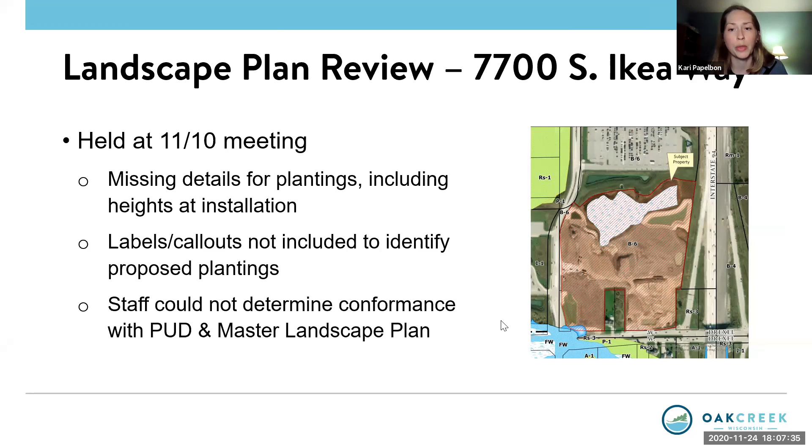This was held at the November 10th meeting, and the reasons for which were that it was missing some details, including for plantings, heights at installation. Staff also recommended that the landscape plans include labels or callouts to identify the proposed plantings on the plan a little bit more clearly. And because of these missing items, staff could not make a determination as to whether the proposed landscape plan was in conformance with the PUD and master landscape plan.

So we do have a revised plan that has been submitted. There have been some updates, including the symbol identification that staff recommended. The heights have been included for some of the plantings, although we do still have mostly container sizes. We do need to have the required installation height due to the requirements in the PUD and code for the installation and maintenance of the screening materials at a minimum height of 3 feet.

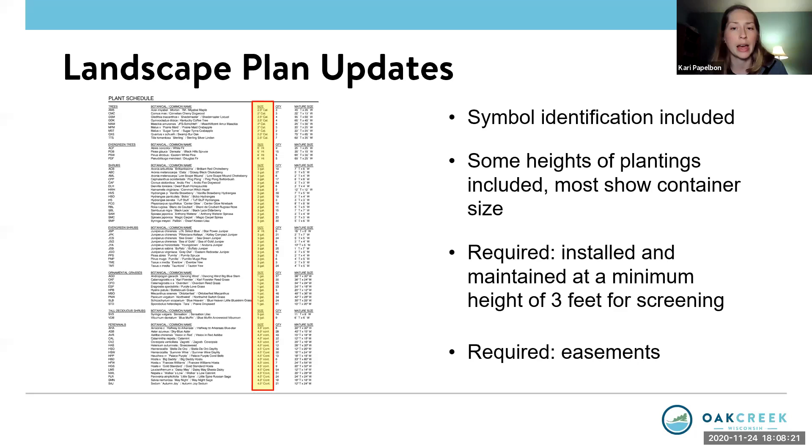So we do need to have those items updated. We also need to have easements shown on the landscape plans to ensure that we do not have any plantings that are interfering with the infrastructure.

So there are a couple of items in the landscape plan that were recommended in the staff report for update. What we're looking at here are particularly the 10 parking stalls adjacent to Creekside Crossing Circle. This garnered some discussion at the last review. In the master landscape guidelines, there is a provision to include ornamental grasses and/or perennials in addition to the required shrub plantings. Staff is recommending a couple of areas in between the planting areas for screening of the parking include those ornamental grasses or perennials to further screen those parking stalls. Otherwise we would have some gaps in that screening.

That same master landscape guideline is also being recommended along the eastern parking areas adjacent to the single-family residential property, to include some plantings in between the proposed plantings. Now there is a caveat to this. There is quite a bit of grade proposed here in terms of slope. There may be a requirement for either grading to knock that slope down, as we discussed in the overall site plan review, or there may be a requirement for a retaining wall, in which case the landscape plan would have to be adjusted to accommodate those. However, we are still recommending, if the landscape plan being proposed can be accommodated, to incorporate the additional ornamental grasses or perennials in between those groupings to further screen those parking stalls from that adjacent property.

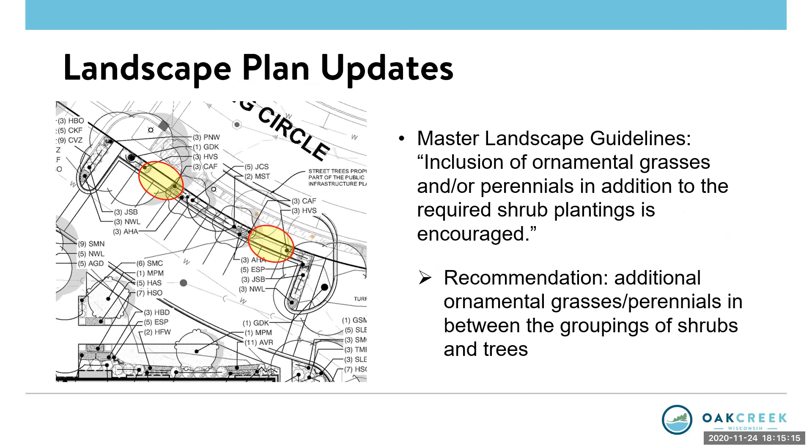Yeah, that should not be an issue. I think specifically on the northern section with the 10 on Creekside Circle, yes, this one, that should not be an issue. I think the only thing, and we'd be more than happy to work with staff on the eastern border, is just determining what the best solution is.

Again, as Kari mentioned, the grade - you can kind of see in the picture on the right that those lines that are bunched together indicate a pretty steep grade. So we'll just have to find the best solution to provide appropriate screening within those, but we're happy to work with staff on what that best solution is. Thank you.

Okay, is that it from everybody?

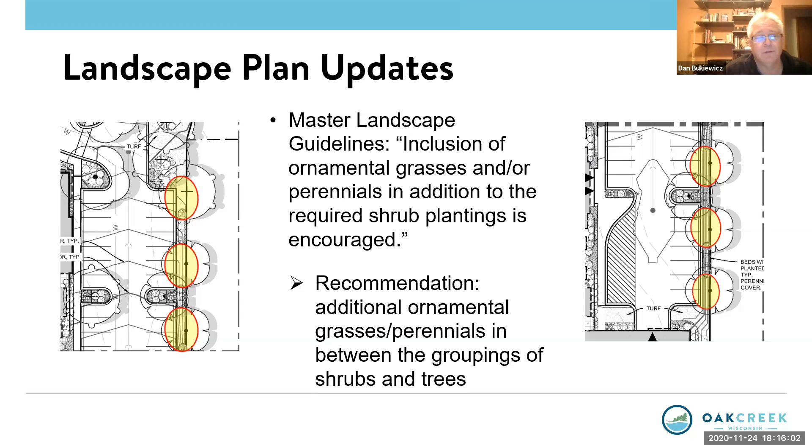I guess, I concur, I think it's a good plan. I think staff's done a good job. I like the addition, the idea of the ornamental grasses - they grow up, they make a great screen, they aid the wildlife. I think it's a good plan overall, so I have no problems with it at all.

Seeing no further discussion, we'll look for a motion on 5A. Lorick moves that the Plan Commission approves the landscape plans submitted by Kevin Kennedy, Walden OC LLC, for a portion of the property at 7700 South IKEA Way, Lot 4 of CSM to be recorded, with the following conditions: Number 1, that all relevant code requirements remain in effect. Number 2, that all conditions of approval from the November 10th, 2020 Plan Commission review are in effect. And number 3, that a revised landscape plan incorporating staff comments is submitted in digital format for review by the Department of Community Development prior to the submission of building permit applications.

Guzekowski will second. Roll call. Hannah, aye. Sullivan, aye. Grillo, aye. Lorick, aye. Kavich, aye. Guzikowski, aye. Lonnie, aye. Seifert, aye. Chandler, aye. Okay, thank you very much.

And again, Dan, just please continue to work with staff, and we trust all the right decisions will be made that way. Appreciate you coming tonight. Have a great Thanksgiving. Thanks, everyone. You too. Okay.

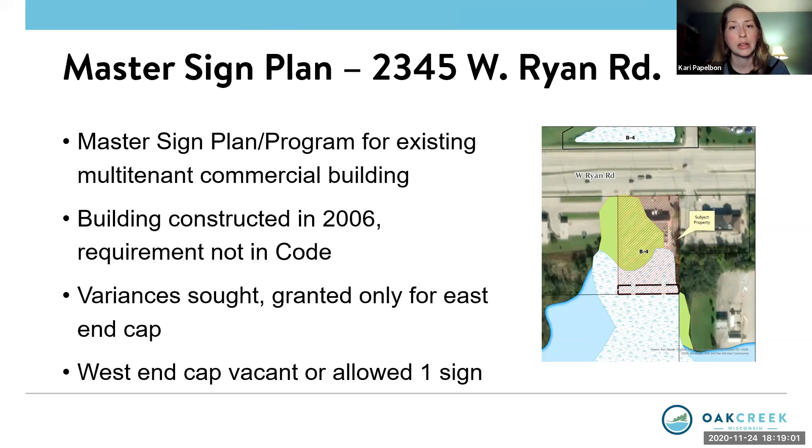Variances have only been granted to one of the tenants, and that's the east end cap tenant. The west end cap has only been allowed to have one sign, or it's been vacant. So right now we do have a tenant in that west end cap that is requesting additional signs, and they were provided two options. One was to pursue variances as had been requested in the past. However, there was a risk, since variances had been denied for the tenant spaces in the past.

The second option, and the one we are talking about this evening, and staff had been helping the applicant and the consultant to present to the Plan Commission, is the master sign plan, submitted by the landlord for the property.

The proposal in a nutshell allows for each of the tenant spaces to have one sign on the north elevation, calculated at 1 square foot of signage for every lineal foot of tenant frontage, up to a maximum length of 75 feet and a maximum sign height of 3 feet. One sign would also be allowed on the west elevation for that end cap and one sign on the east elevation for the other end cap.

They would be allowed a maximum square footage equal to their north elevation. This chart shows all of the allowed signs on the building, the maximum square footage, and the maximum length. The end cap tenants would be the only ones allowed to have two signs. Per the master sign program, which has a few other items regulated by the landlord, no signs would be allowed on the south except those required on the doors to identify the tenants.

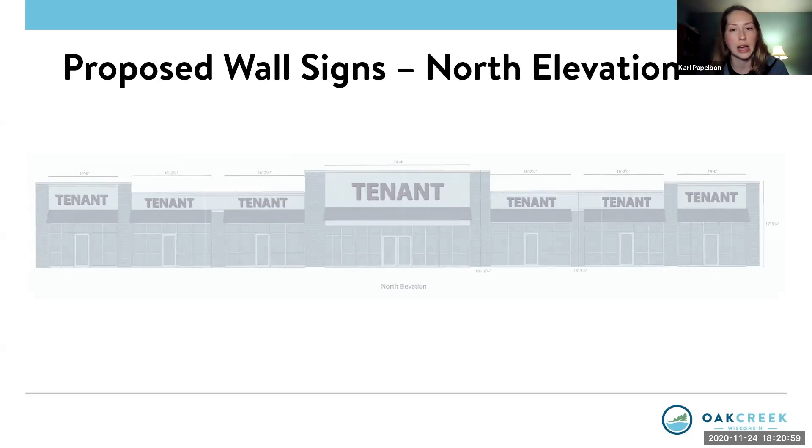This is a graphic showing what the north elevation would look like in the master concept. This is an existing building with existing signage, which will be important when we get to the one change staff is requesting. The end cap tenants will have the same square footage allowance as the north. The monument sign is existing, and they're not proposing any changes to that.

The one change before we get into the suggested motion is for section E of the master sign program. This was in the staff report, and we're requesting, as part of the suggested motion, that this be amended to clarify that any signs, regardless of whether they existed prior to the adoption of this master sign plan, would still have to abide by code.

There have been some temporary signs in place in this area, perhaps not for this particular building, but in the area. We just want to make sure everyone is aware that signs need to abide by code, and some may need permits. So with that, the suggested motion is for approval, as shown on the screen for Plan Commission consideration.

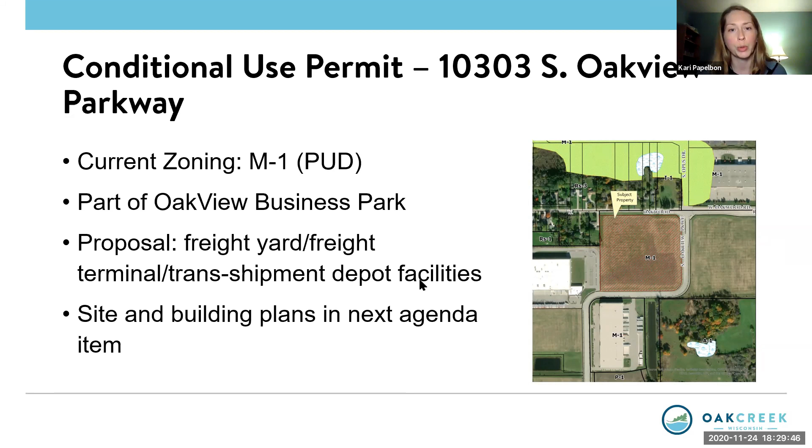Thank you, Mr. Mayor. This property is currently zoned M1 PUD. It is part of Oakview Business Park, at the northwest corner of the park. The entrance is off of Oakwood Road, and the proposal is for freight yard, freight terminal, transshipment depot facilities, or what we would normally refer to as distribution facilities. The site and building plans for this particular parcel are actually on the next agenda item for Plan Commission consideration, so we will be spending the remainder of this meeting discussing this property.

Potential uses within the proposed building include warehouse, light assembly, and distribution. Although no tenants have been identified, the building can accommodate a single tenant up to 4. There are about 28 depressed docks and 4 at-grade docks on the west side of the proposed building. They are anticipating 80 employees, although that may change based on the type of users that end up being tenants. They show parking for 28 trailers with 28 future parking stalls on the west side of the dock area, and 110 parking stalls on the east for employees and visitors, each accessed by different access points off of South Oakview Parkway.

Anticipated hours for the tenants within the building right now are estimated at 6 to 7, however that will likely change based on the tenant's operational needs. One quick announcement about the outdoor storage mentioned in the staff report: it would be limited to the parking of trailers and trucks in the loading dock area, possibly at the docks themselves, although as seen in the site plan, there are 28 parking stalls. There would be no provision for additional outdoor storage, and tenants, based on their particular business operations, may require additional conditional uses depending on the extent of their business.

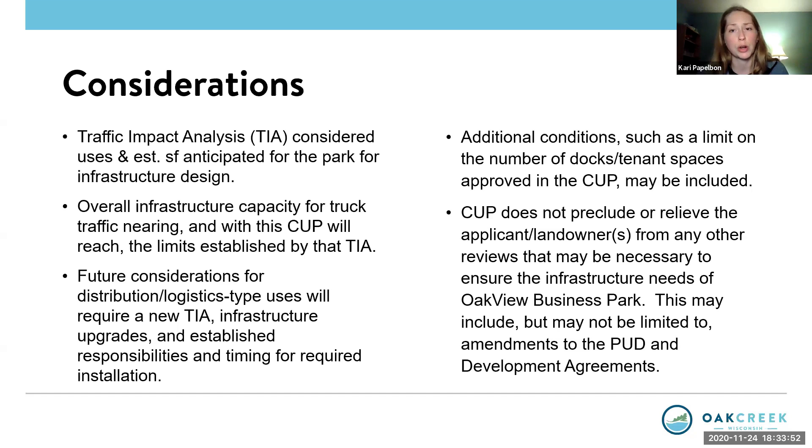Mr. Mayor, thank you Kari. Kevin is the applicant—would they like to say anything, or are they just available for questions? They are available for questions, and then we did have a neighbor sign up to speak as well.

Sure, please allow the neighbor in. All right, Maggie, you should be able to unmute yourself, and then we'll need your name and address for the record. Sure, I'm Maggie Menard Miller, 320 West Oakwood Road.

We live directly across from where the trucks would be coming and going, and we also, on a northern part of our property, are bordered by the FedEx truck terminal. So what you're proposing here tonight is having truck terminals both to the south and to the north of our residents in a residential area. I take this as being quite unfair.

If there's other space available in that park, I would think yet another truck terminal would be more appropriately placed someplace else than directly across to and next to properties that are clearly residential. We had a nice quiet neighborhood here for a long time, and we've been promised earth berms and whatnot, and we'll talk about that in the next point. But I think overall that this is a really bad choice to have directly across from our residential area...

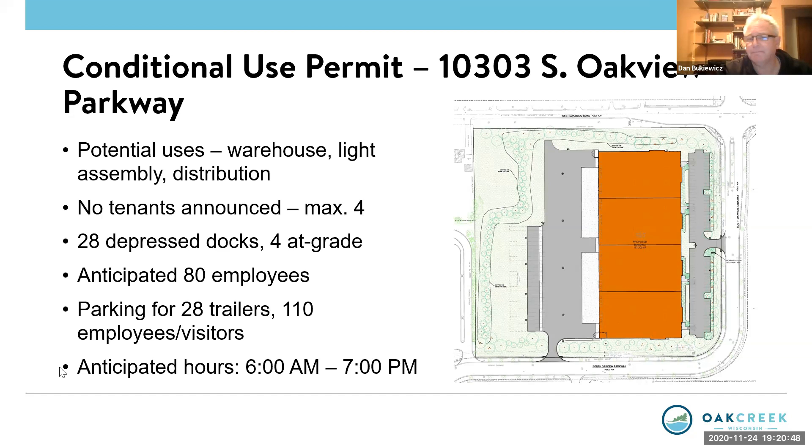How about a motion? Guzekowski makes a motion that the Plan Commission recommends that the Common Council approves a conditional use permit for a freight yard, freight terminal, transshipment depot facilities within the multi-tenant building on the property at 10303 South Oakview Parkway, after a public hearing and subject to conditions and restrictions that will be prepared for the Plan Commission's review at the next meeting, December 8th.

Seibert seconds. Roll call? Anna, aye. Sullivan, aye. Grillo, aye. Lorik, aye. Kavich, aye. Guzikowski, aye. Donnie, aye. Seibert, aye. Chandler, no. Okay.

That leads us to 6C, and as Kari said, this is a plan review of the building site, landscape, and related plans on the building we just talked about for the Dickman Company on the property at 10303 South Oakview Parkway. Thank you, Mr. Mayor. So now we are going to move into the actual site and building plan review for the property we were just discussing. Again, this is in Oakview Business Park, at the entrance to that park on the north.

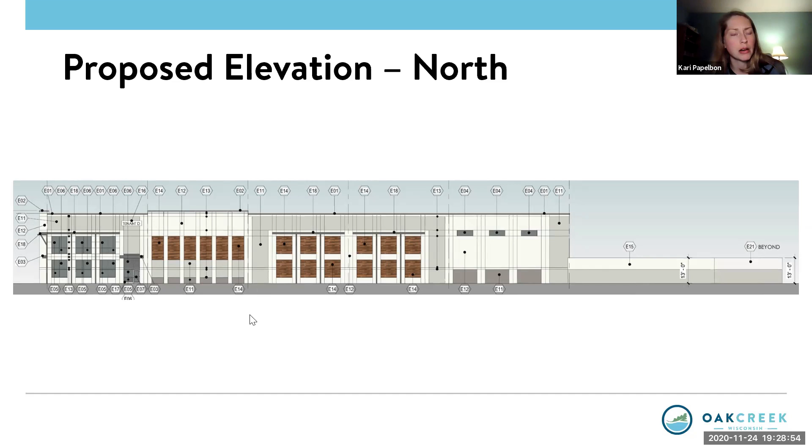There are also metal canopies over some of these decorative elements, as well as the entries and windows. The windows incorporate spandrel and vision glass, scattered throughout for each of the window clusters, giving a bit of variation and providing for both regular windows and just decoration.

Rooftop mechanical units are required to be behind the parapets in these proposed elevations. Any ground mechanical units, utilities, or transformer boxes would have to be adequately screened. When those are sited, they would have to be incorporated into the landscaping plans and submitted for our department's review in order to ensure adequate screening.

The west is entirely dock areas. You will see some transom windows above the docks in various locations. There's a dumpster enclosure on the north and another on the south. That's what the trash enclosures are proposed to look like—they will have precast concrete panels to match the building with metal gates.

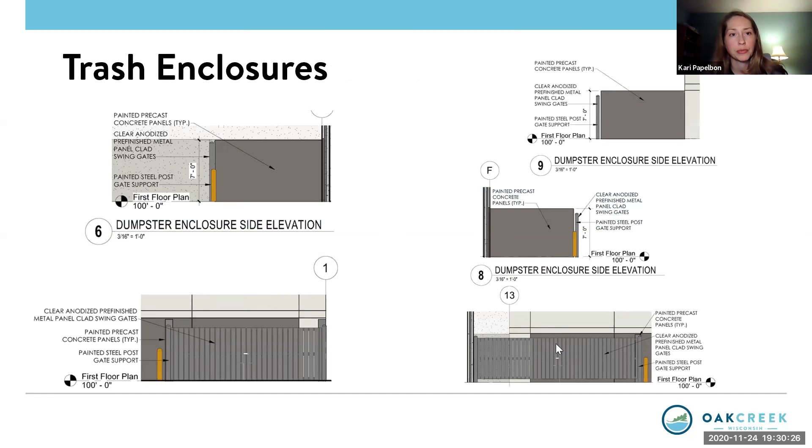There was a master sign plan presented as part of the submittal; however, there are some details missing. Basically what we have are locations and maximum sizes for these particular signs. However, we do need some additional details that would require a more in-depth master sign plan review, and the applicant is aware of that. So that would be brought back to the Plan Commission for review at a later date. Having said that, the monument sign presented does meet the size, locational, and setback requirements for code, as long as the footings and foundation for the sign remain outside of the easement area.

I should mention one other thing, included in the recommended conditions, and that's for light fixtures. We didn't include the photometrics as part of this presentation, but they were included in the Plan Commission packets. In order to be sensitive to the residences in the area, we are requiring that all fixtures be shielded and directed downward as we normally would. The applicant did include the recommendation for the maximum color temperature to be 3500 Kelvin, so thank you for amending those plans to include that. Also, we are requiring that fixtures adjacent to the residences be shielded on the side adjacent to the residence to provide additional shielding of the lights. That is incorporated into the conditions included as the suggested motion for Plan Commission consideration.

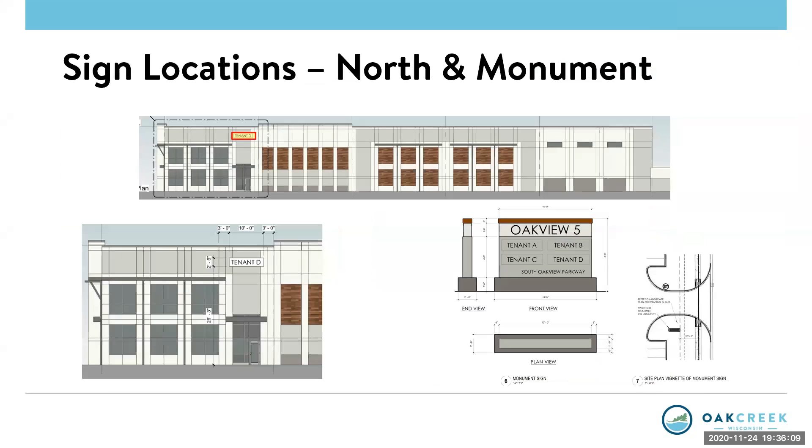Tom also has some comments on this. Go ahead, Tom. I had a question. Kari mentioned the screening wall by the dock. On the north side? On our end and on the south side. How long is that wall and how tall is it? I know the south is a little longer than the north. I'll let Kari answer that.

There's kind of a stubby wall that comes out there, and I'm not good on guessing at how long it is. Boy, I couldn't tell you, Tom. Anybody got any knowledge of that?

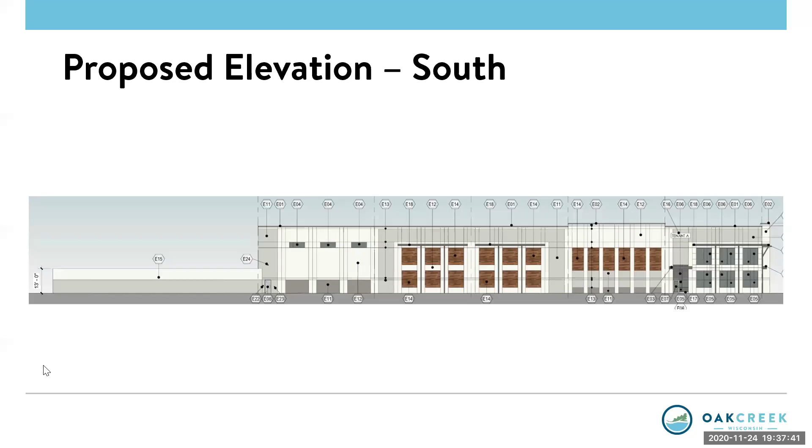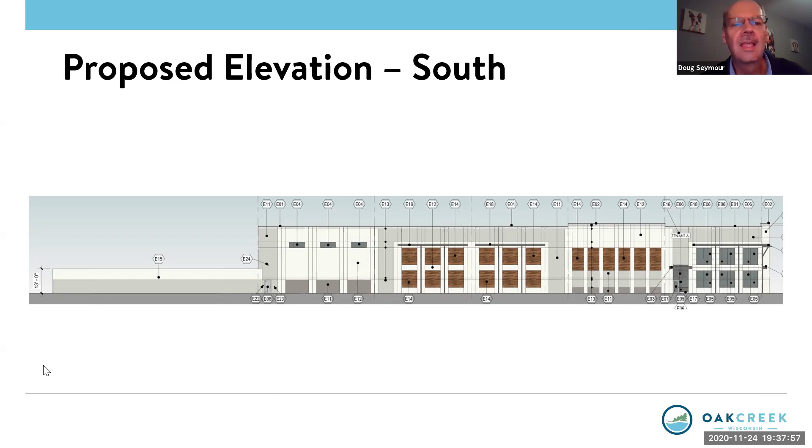Just anecdotally, I think the ones existing in the park, to my recollection, take about 1 truck length from the building. I suspect this is quite a bit more than that. If you look at the site plan that was presented, I think you can actually see that. It covers pretty much the entirety of the truck loading area. It doesn't go all the way out to the end of the parking lot, but it does cover quite a bit of that. You can see that white area on the west end of the building - I believe that to be the truck parking and loading area. You can see that dark line extends past that. So I think that's actually quite a bit more than what we've seen at some of the other conditional use permits in the park.

That would be good. The more of that parking lot you can cover up, the better. Because if you stood at my driveway, you'd see a berm. Maybe the berm should be taller. You see the pine trees and other trees - that's good, hopefully they're large when planted. Because some of the ones by FedEx down Oakwood Road are like 2 feet high at present, a year and a half later. And if that wall is there, that's 3 good steps to protect us a little.

This is Carrie. Just to clarify, I apologize if it wasn't clear earlier, but those evergreen plantings on the berm are proposed to be installed at a minimum height of 6 feet. Wonderful. Holy cow, that should do it.

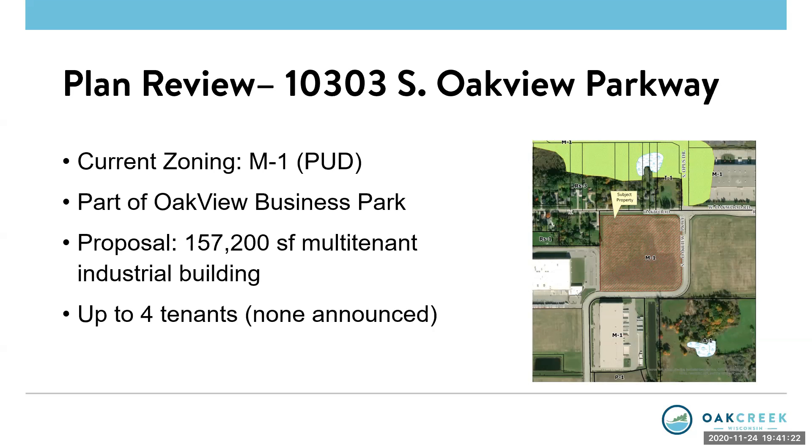So one of the points I wanted to make was I can't stress strongly enough the importance of the berming and the landscaping that's being proposed. I'm actually pleasantly surprised with what is being proposed. There is about 150 feet from my property line before the berming starts. And Maggie earlier mentioned the height of the berm, that it would be a minimum of 4 feet. Is that correct?

That is what staff is suggesting, if I'm correct. On the north side, it was 4 foot, but then the trees would be a minimum 6 foot, so realistically it's a 10-foot barrier. Mayor, that is correct. Staff is recommending that the berm be no shorter than 4 feet as measured from the adjacent property's grade on the west, and no shorter than 4 feet as measured at the same grade as the road on the north, with minimum evergreen plantings installed at a minimum height of 6 feet.

Okay, so since there's a minimum, silly question, is there a maximum height that is allowable? I think it depends on the tree and how high it wants to grow. I can't answer that one. No, I'm talking about the berm itself, the physical berm, not necessarily the plantings. I'm not an engineer, but you start getting into stormwater management with the height of the berm, and maybe Matt could address that a little bit for us. Given the width of the land, the higher you go with the berm, the wider it gets, and things like that. But Matt, anything you can help with?

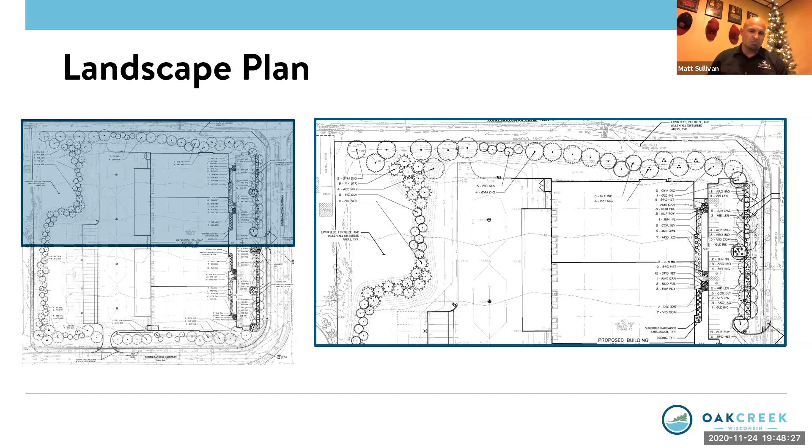Thank you. Matt, I guess I just have a few comments regarding those berms. I want to reiterate what everyone's been talking about as far as trying to maximize their heights. One concern the civil designers will have, especially on the north side, is if we continue to increase that berm greater than 4, 5, or 6 feet, whatever it may be, there are a number of utilities that run along Oakwood, and there's a drainage ditch along there. So there have to be considerations to make sure we don't negatively impact those as that berm increases. There will be some natural limitations from the lay of the land that would stop us from increasing heights, but we'll try to get to 4 feet as Carrie has mentioned, and my suggestion would be to maximize that without creating a negative impact.

Obviously on the west side you have a little more play as far as increasing that height, if that's what the commission chooses, to try to maximize that height and keep a certain distance away while not negatively impacting any drainage or utilities along those sides.

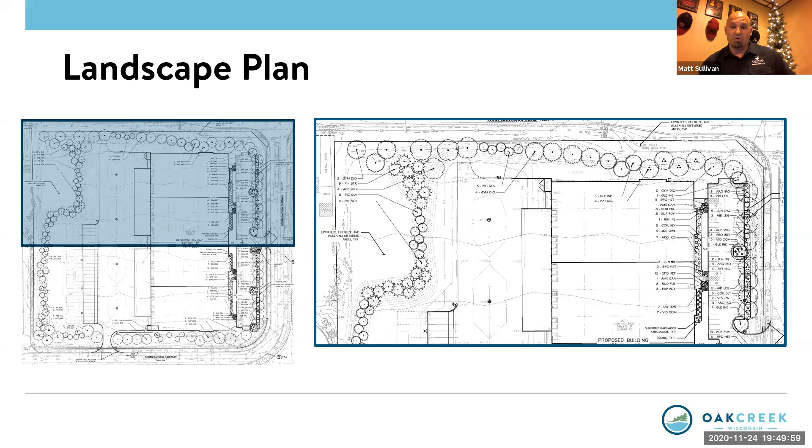Outside of that, I think I agree with a lot of people on the look of the building. This is much improved compared to what we've seen built in the park, even the ones along Howell. This is a much better looking building, and the landscaping is much more extensive, so we appreciate that from the developer. I think they've done a good job balancing cost, benefit, and looks. Other than that, engineering has no other comments.

Okay, thank you. Dawn? No comments. Greg? No questions. I'd just like to thank the staff for advocating for higher berms and a little more screening where they can to help out the neighbors a little bit. So thank you for that. No other questions though. Thank you. Thanks. Chris?

No, I think it's a good looking building project. I appreciate the applicant working to make sure they're sensitive here. They've built other buildings in this area, so they're definitely sensitive to what's going on. I appreciate that, and I appreciate the neighbors, Rob, Maggie, and Tom, bringing up their concerns tonight. Now the onus is on us. We need to also look for solutions for Oakwood Road, and I know, Mayor, we get countless emails about it, so we need to figure out how we can alleviate some of these issues here. But this project, I concur, looks really nice.

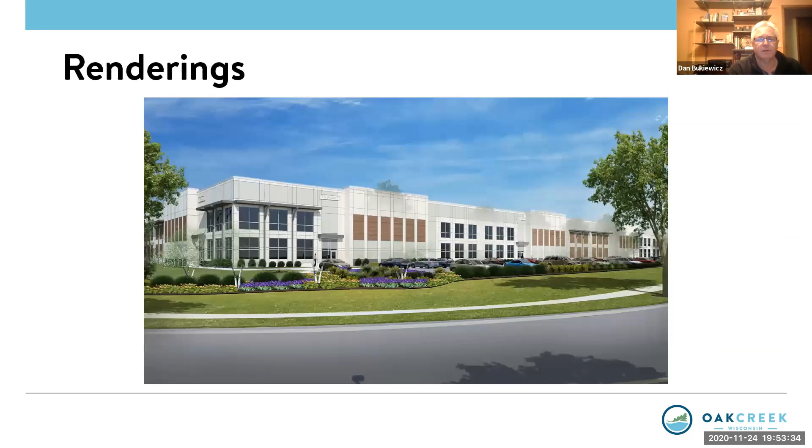Will that create a problem for the people on the west side with that height? We do have the shading—Carrie brought up the shading to the residential properties. So of course, anything to the west and north would definitely be shaded. I can't speak about anything on the east or south. Okay, I just was curious. Thank you, oh okay.

Chaucey? I do have a question for the applicant regarding the truck traffic flow. I noticed on one of the renderings there were parked cars, I believe that was the front of the building. Is that specifically for employees, or for visitors to the building, or customers?

I would assume yes. You wouldn't want pedestrians in the back if there are loading docks or anything of that nature. Could be employee parking in the back as well, but with the semis, you'd want to eliminate car traffic back there.

Is the applicant with us? Yes, I'm here. If I'm wrong, please correct me. No, the east side is intended for employees and patrons.

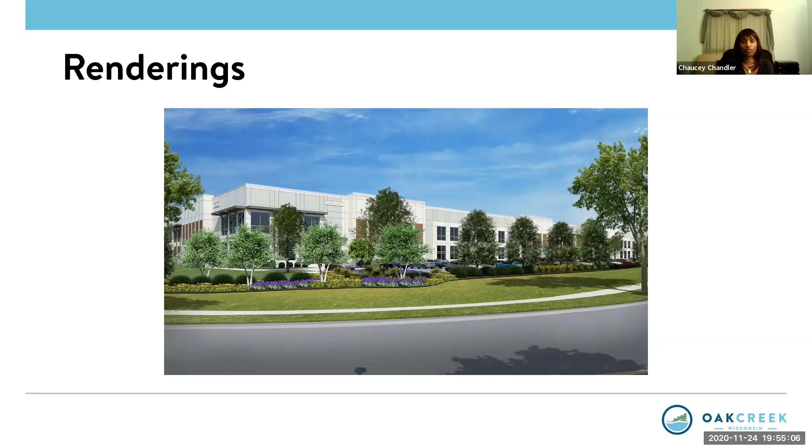Okay, and with the employees that work there, can you provide more information on pedestrian safety while they're walking across the lot with large trucks coming by? There would be no trucks coming through the parking lot, that's strictly for car parking. Okay, so it's segregated, got it.

Can you provide more information regarding the signs that would be on the building? We did an overall size and generic design, but we'll come back with a sign contractor with more specifics. We identified the maximum size, the location, the height, and were pretty detailed with the monument sign, but we can come back with more specifics.

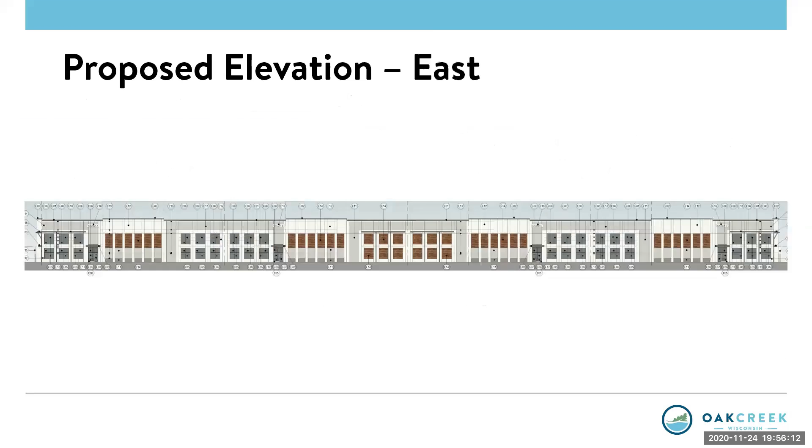The actual sign content is generic at this point because we don't have a specific tenant. As specific tenants come up, we'll deal with whatever that tenant needs, they'll come in with their proposal for their specific sign. But the locations, overall size, and height are identified, and the square footages indicated are within the guidelines of the sign ordinance.

Okay, thank you. Sure.

Very quickly, I'll add, very well said commissioners. I agree, it's a nice looking building. I'm really impressed with the landscape, it was really beefed up, whether through the staff or partnership with the applicant, it's much appreciated.

I tried to answer as many questions as I could along the way regarding the length of the wall, the height. Carrie got the berm, we had extensive talks about that.

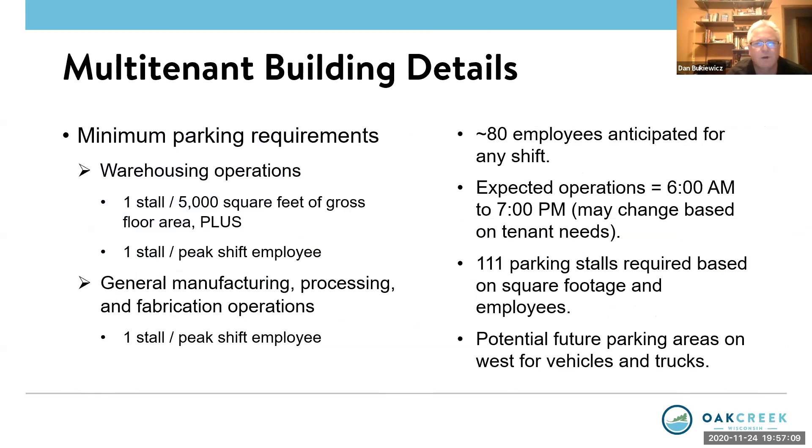Maggie brought up the sidewalk, and I really apologize, I'm unfamiliar with the site. There's a sidewalk, is that on the south side of Oakwood, north side of Oakwood? For some reason I'm picturing it on the north side, or am I mistaken? Can anybody educate me on the sidewalk we're speaking about, to extend possibly?

Mayor, Matt Sullivan. The sidewalk actually is from Howell Avenue to Oakview Parkway on the south side of Oakwood. What Maggie's talking about is trying to get that through the intersection and continue along Oakwood, at least through this property, up the south side, to provide them with some walking space at least.

From what I understood, what Maggie was talking about is that there are some logistics there, as far as fitting it with an increase in the berm, the drainage. Maybe this is something we discuss in the future, widening Oakwood a little bit to get more of a paved shoulder, like we've done on other roads where we've tried to accommodate bikes and things along the shoulders. This is something we'd have to look at further. I don't know if it would be appropriate to put onto the site here, it should have been part of the development, in all honesty, if that's what we were looking to do.

Okay, thank you for that information, Matt. And again, boy, I really don't want to open up a can of worms here, but Matt brings up a good point.

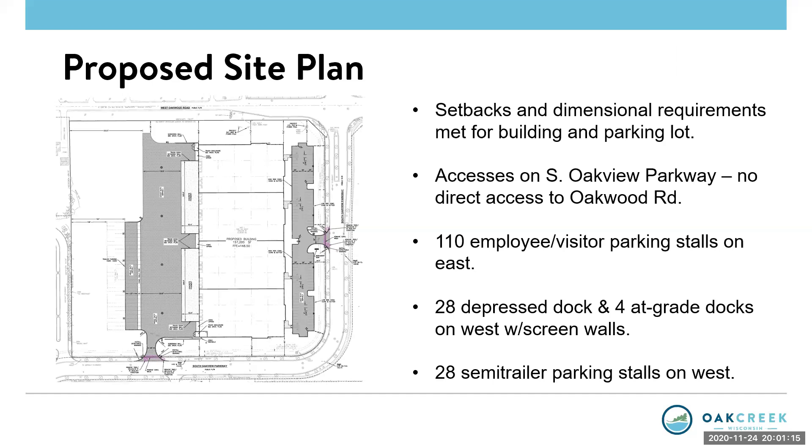Is there any other questions or comments? Seeing none, we'll look for a motion on 6C, please.

Guzikowski makes a motion that the Plan Commission approves the site and building plans submitted by Samuel Dickman of the Dickman Company Incorporated, for the property at 10303 South Oakview Parkway, with the following conditions.

One, that all relevant code requirements are in effect. Two, that the plans are revised to include locations of all mechanicals, transformers, and utilities. All mechanical equipment, transformers, and utility boxes on the ground, building, and rooftops shall be screened from view.

Three, that all light sources are shielded and directed downward, that the color temperature of the fixtures is limited to a maximum of 3,500 kelvins, and that light sources adjacent to single-family residential areas are shielded on the side of the fixture adjacent to the residential area.

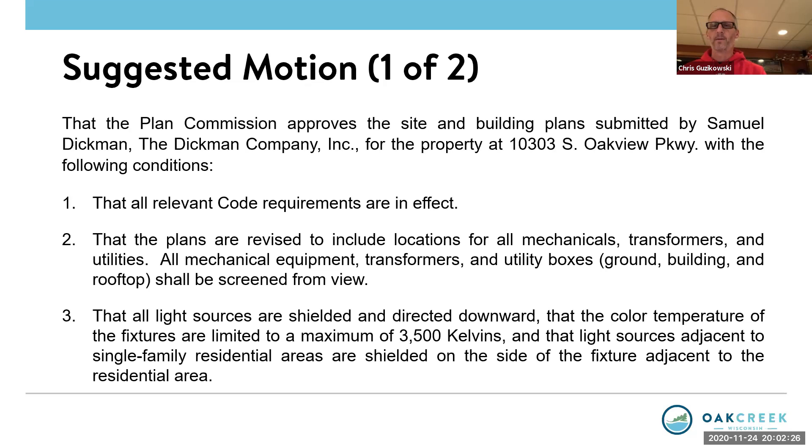Four, that the landscape plans are revised to incorporate staff comments regarding berm heights, berm plantings, and details for canopy and heights of all screening plants at installation and maturity.

Five, that a detailed master sign plan is reviewed and approved by the Plan Commission prior to submission of sign permit applications. And six, that all detailed revised plans are submitted in digital format to the Department of Community Development prior to submission of permit applications.

Thank you, commissioners. Thank you very much. Appreciate all the comments, neighbors. Thank you, you guys really do know the area best. I really appreciate you taking the time to comment and help guide us through this. It's most appreciated. So, staff, I want to thank you, great job, without a doubt. You always seem to make it look easier than it really is, but I appreciate the way you get everything in line for us.